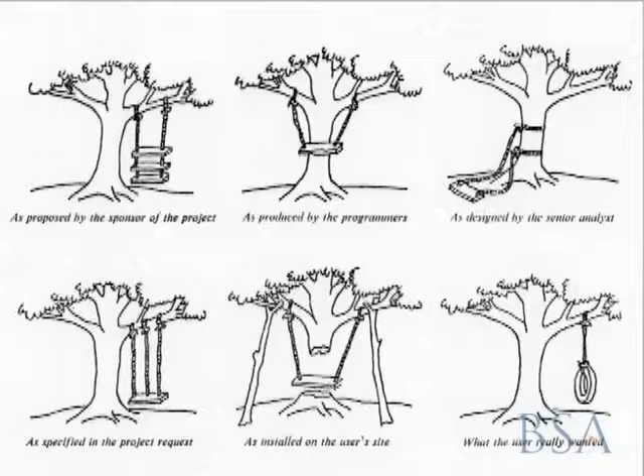Now, as we know, architects are quite a diverse group of individual practitioners. The client, equally diverse, needs to clearly describe a program for the architect to work on, which is not always very clear. The architect then needs to properly interpret that program and develop a scheme that fulfills the client's endeavors, and to some extent, at times large and small, to develop the architect's own aspirations.

The architect then works with a host of engineers and advisors to develop a set of construction documents, and then those documents are turned over to a contractor and subcontractor to interpret and execute. More often than not, a satisfactory piece of design is executed or realized.

What is often forgotten is the context in which a piece of architecture is built. Besides the physical and environmental context, there are often historical references, cultural background, social influences, visions and dreams to be realized, and special conditions that may challenge conventional approaches in terms of developing a solution.

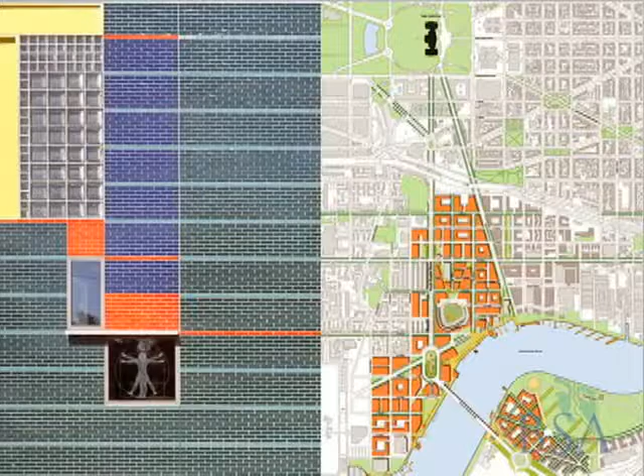Eventually, concepts and design translates program and context through a series of diagrams, drawings, and models that reflect certain patterns and relationships. The exercise of developing design solutions for architecture and urban design are very similar.

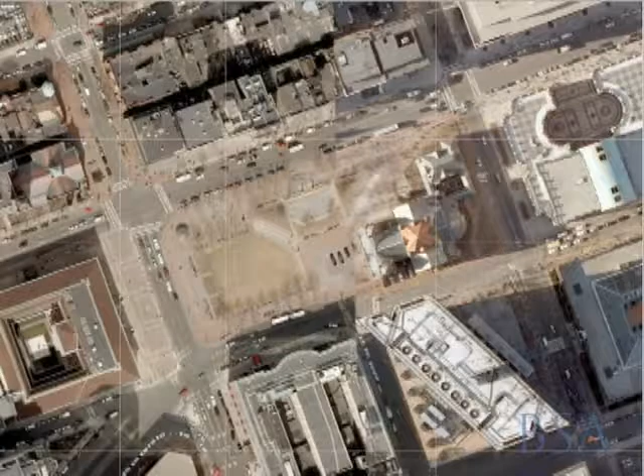I will demonstrate. For example, let's consider the planning and design of one of Boston's great public spaces, Copley Square. The space is framed by the Boston Public Library. Its formal facade is almost centered onto this plaza in front of it.

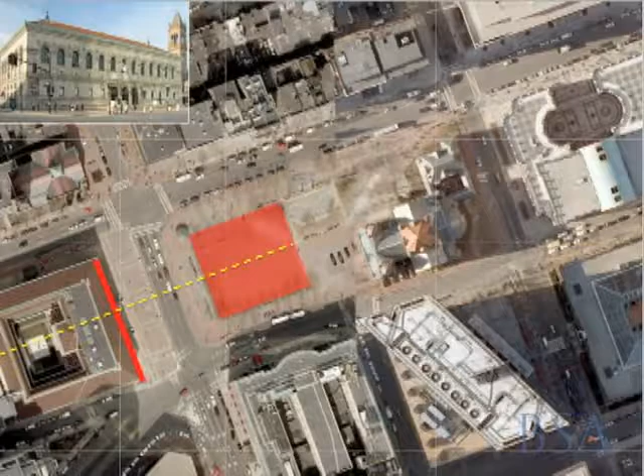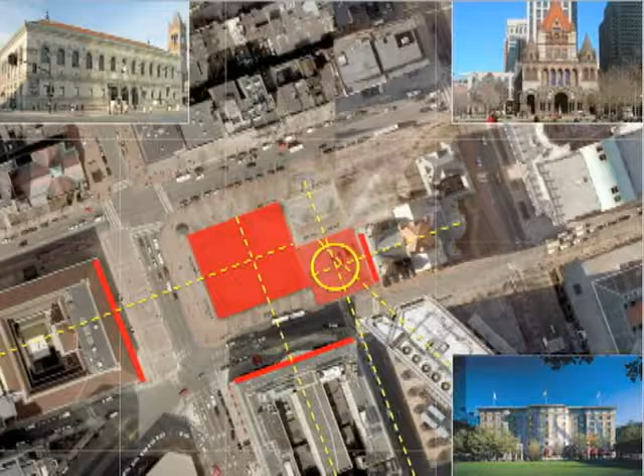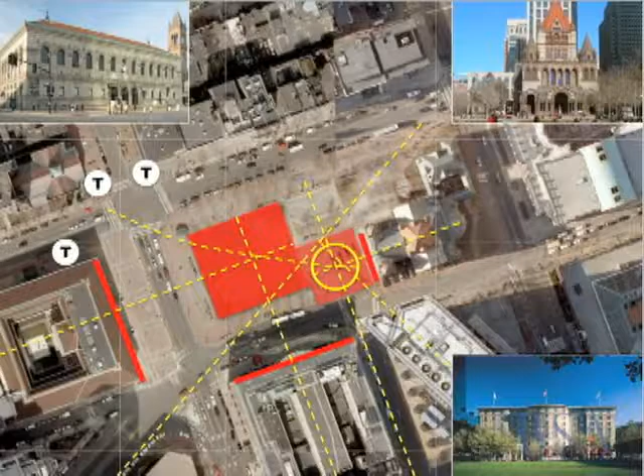The Copley Plaza Hotel similarly has a relationship to that same plaza. Trinity Church has a smaller little plaza in front of it, of which it's on axis, but Hancock Tower and Trinity Place is also aligned with that same space, and a vehicular drop-off, more formal arrival and departure point intersects all of that. There's a series of T stations that channel people from the intersection towards these two formal spaces and pass beyond.

Boylston Street is a relatively uniform retail street in which a series of landscape and trees help to reinforce that edge, as well as a smaller group of trees in front of the hotel.

The secondary facade of Trinity Church has a bosque of trees so that the front of the church is well set up, but it also adds to, along with another group of trees and a fountain, this landscape edge that buffers the formal spaces from the busyness of Boylston Street, but also brings the landscape edge into that plaza.

Now, such an exercise in thinking of, say, a typical apartment can be very similar. For example, if you want to think of where you might want to put a bed, and you like sunlight to come streaming through, but given the lack of walls, there's only one piece of furniture.

So you might say, well, that bed is also semi-private, but at the same time, your bed partner has to walk around that bed in order to get out of that room.

So you might think, oh, let's move that bed to the opposite wall. I get an extra piece of furniture. Sunlight still comes in, but it's over my head. The bed is still semi-private, and circulation is a little bit better.

Perhaps a third solution would be on the side — same amount of furniture, the bed is more prominent as one looks into the room, and circulation is equally divided.

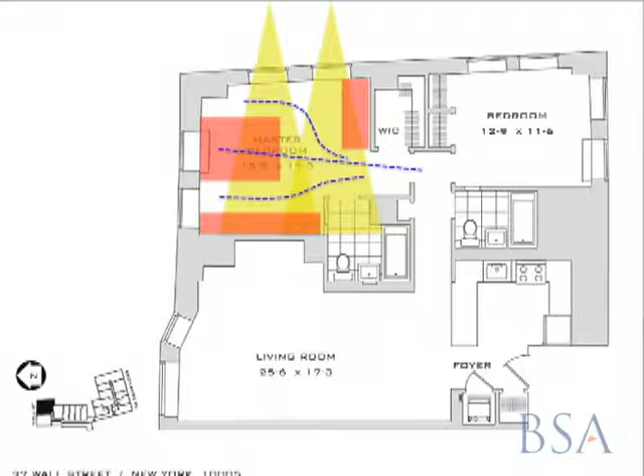You may feel, though, that this room is inadequate for your tastes or your needs, so you're going to convert and think of converting the other bedroom into a more elaborate suite, especially since it has both east and south light, and it's totally private from the doorway.

And you take it a step further, well, at that point, we wouldn't need the extra bedroom and the bathroom, and we'll create a much nicer living room, which can be featured as one walks in, and you have more flexibility in how you use that space.

Now, if we squint and imagine that windows and doorways are, say, street corridors or buildings, and the rooms are building facades, we may get some sort of diagram that looks like this.

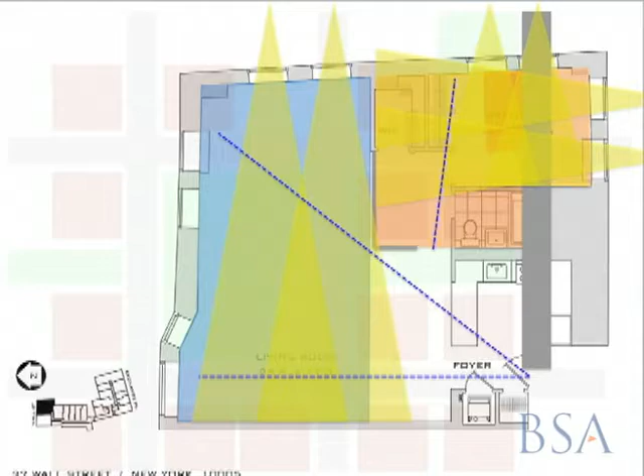Overlaid streets, blocks, parks, circulation patterns, deferring to sunlight coming in during the morning and afternoon. So the graphic exercise is quite similar if we think of both architecture and urban design as a designer's element.

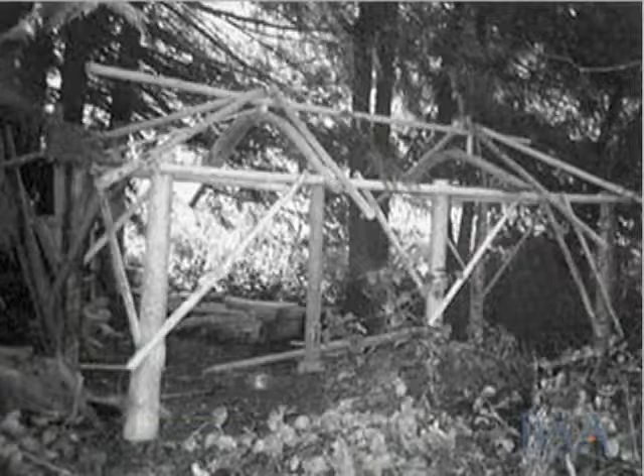Architecture doesn't always begin with context or environment. It begins with perhaps a fundamental structure of what it wants to be and needs to be. The simplest form of structure is the so-called primitive hut.

In the most natural setting, the primitive hut is a mere shelter, in this case, a tropical outhouse. But there can be regional interpretations of such a structure. There can be architectural mimicry, whether it's classical or brick. There can be influences set by site-specific conditions. There can be stylistic whims.

There can be advances through materials and manufacturing. There can be misguided attempts towards efficiency or hierarchy. There can be humor in being unabashed, yet private. That's a mirrored outhouse that you can see out, but you can't see in. Or there can be unabashed use that is entirely public.

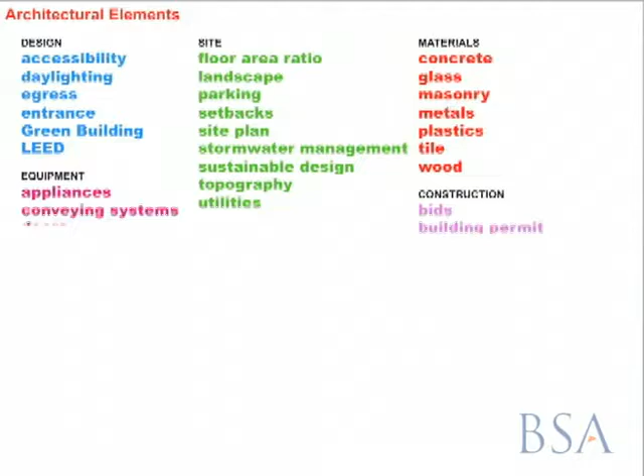There can be adaptive reuse. And there can be promotion and revenue production. Now, in all of those cases, in a nutshell, the product of architecture is largely centered on physical elements. Any connection to urban design is mostly through the design, the site, and regulatory elements. So you can see a lot of these things are related to equipment, wiring, etc.

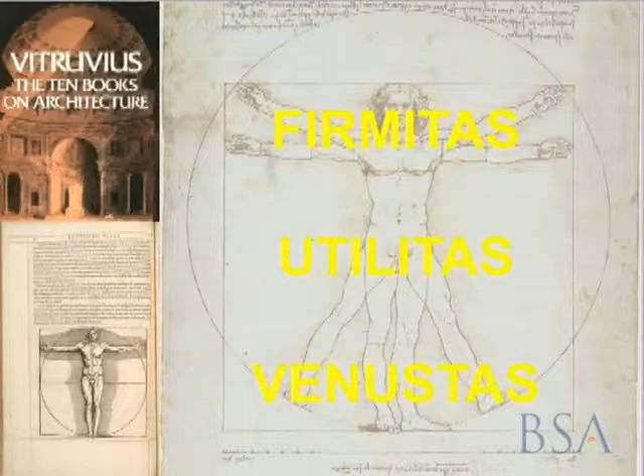The measure of success of architecture is often esoteric and subjective, although there are many attempts to codify that measure of success. Here, Vitruvius dictates that architecture should be beautiful, useful, and durable, or durable, useful, and beautiful. But given our diverse social and intellectual population, even formal measures can be interpreted, misinterpreted, and outright modified. As an infamous pirate of the Caribbean once said, codes are only guidelines.

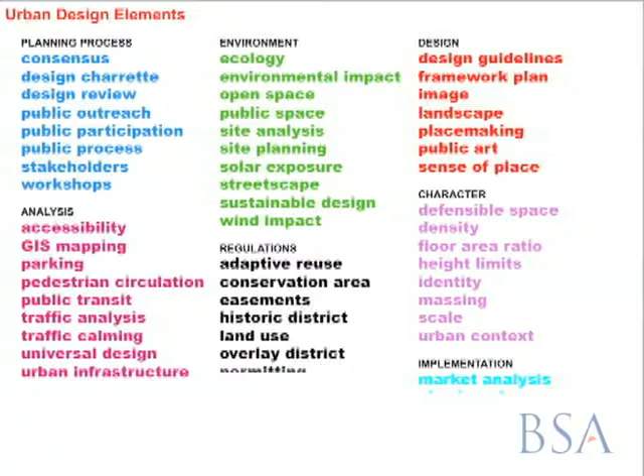Now, urban design, while architecture focuses primarily on the object, urban design primarily concentrates and considers the larger issues surrounding the object. Again, as you can see, the overlaps are in words like design, site, and scales of physical elements.

Urban design has come to be known as large plans, determining the direction, scale, and pattern of urban evolution. Urban design plans often work from a determination of what is good, what is desirable, or what is less desirable, how things fit together, and how things are linked in a cohesive manner.

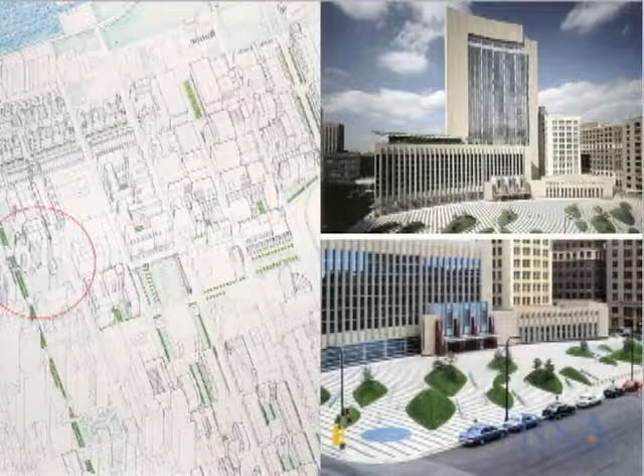The mitigating element is largely the public spaces that help unify and transition from one place to another. More often than not, urban design are just mere guidelines and take many years to realize, and it's interpreted by future designers. A measure of success would be the quality of materials, and in this case, a federal courthouse and a civic square, that the urban design plan was interpreted in a pleasing way.

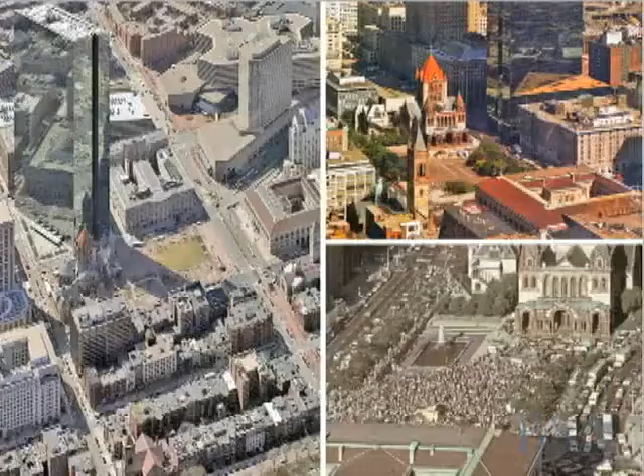Boston's Copley Square is one such place. However, it could have been very different if Huntington Avenue was allowed to remain as a through street passing by Trinity Church. And we could imagine commercial development could have happened there.

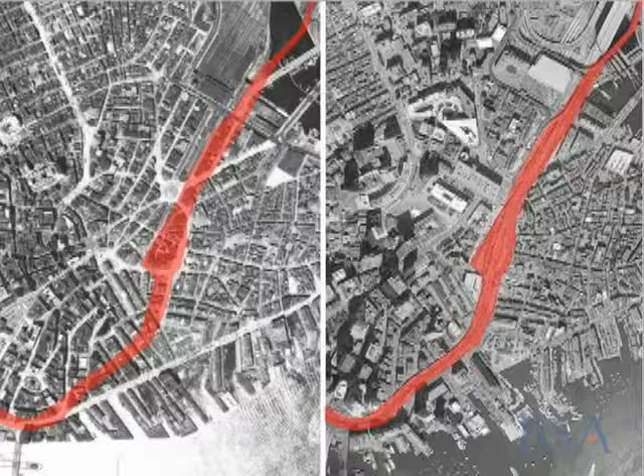Now, how urban design is used to respond to change is not entirely satisfactory. The replacement of the central artery, which cuts through a tight fabric of Boston, creating a corridor for the highway. What was once a dense urban fabric was replaced. The highway was replaced by a greenway.

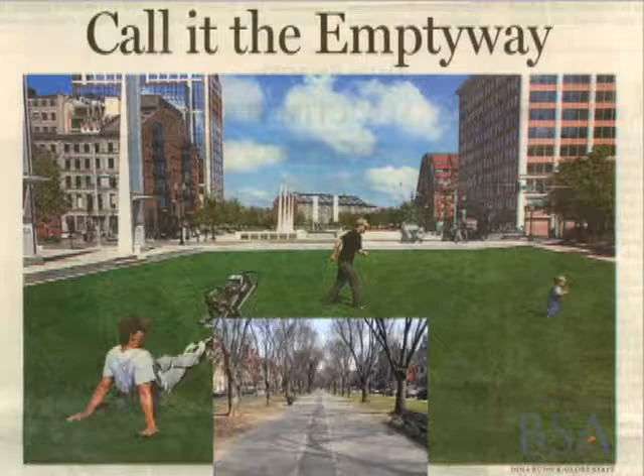That greenway, the recent reaction to it has not always been positive. It has been tepid. The 27 acres, while green and full of light, replaces a highway with a space corridor that is 50% wider than Commonwealth Avenue. The relative absence of trees, buildings, and activity exacerbates the scale of that open space.

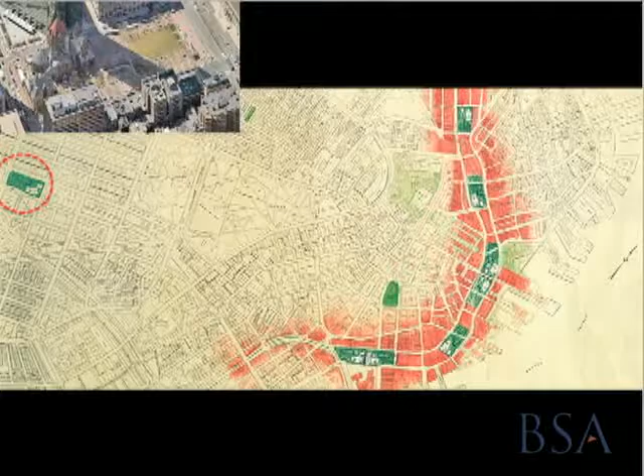Since Boston is known for its many squares, perhaps it's not too late in some distant future that the Greenway have an opportunity to evolve, and perhaps using the scale of Copley Square as a model, that 7 of such squares can be laid down along the Greenway, and the spaces between may allow the city to knit, reknit, and repair itself.

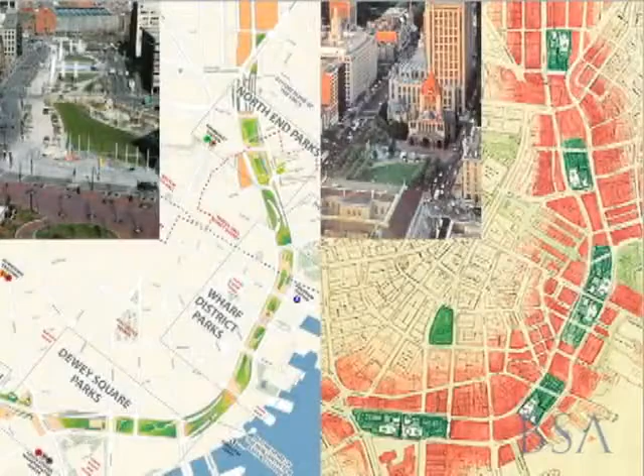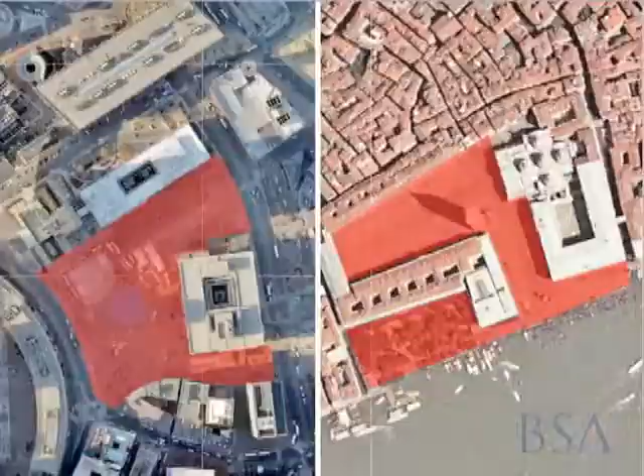Piazza San Marco, a known successful civic space, has a similar size and type of material in the plaza, and it's surrounded by buildings similarly, but a bit older and more uniform. Here you can see the comparison of the two in scale. What's most different are the activities along its edges.

San Marco is lined with commercial activity all along its perimeter. There's plentiful seating. Nightlife, art displays, and carnivals are a recurring feature, particularly lighting, inviting participation in activity. City Hall Plaza can have the same.

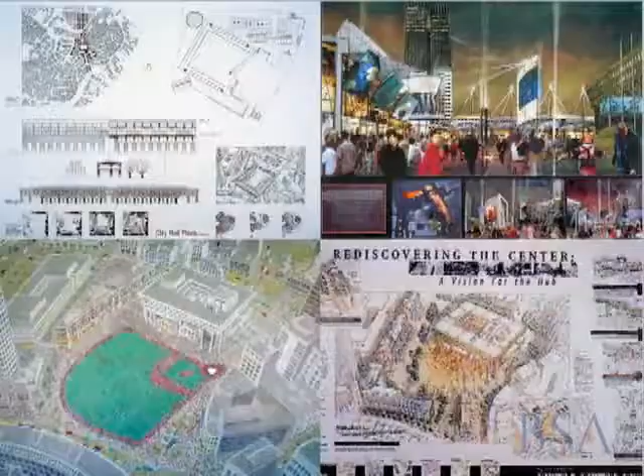These are some ideas generated over the years that people have sent in of how we can rejuvenate that space. And we could even be playful and have selective programming events that are carnival in effect. So what possible elements might there be?

Right now, government buildings with live activity, perhaps some commercial activity along the edges to provide 24/7 activity, some landscape, some improved paths, especially extending Hanover Street back towards North End, improving the connection to the harbor.

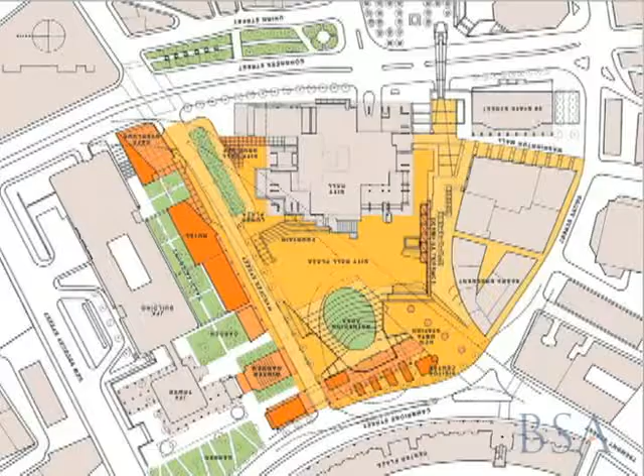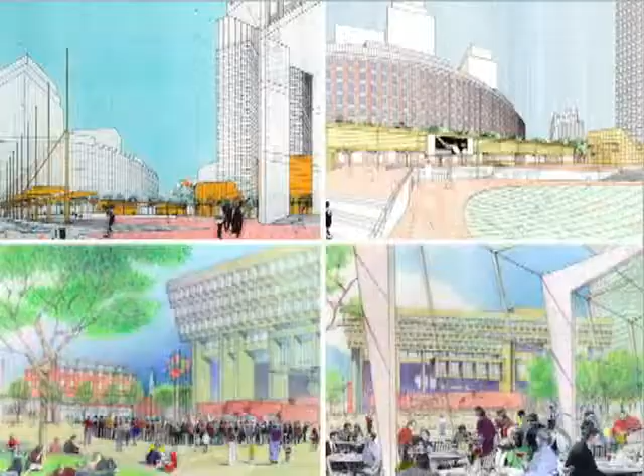Some water feature, perhaps on the surface, that can be turned off when you need room for large crowds. Improving access to the subway, even modifying the edges of City Hall itself.

So far, one edge of City Hall Plaza is improved by a pergola that provides some lighting, some seating, some shade. What hasn't been done is utilizing the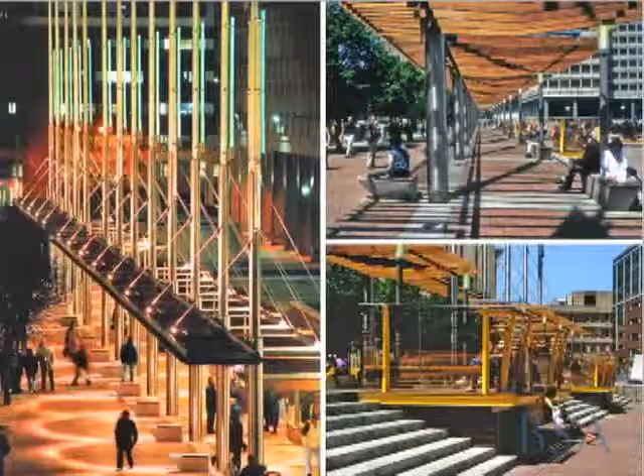structural columns to string screens for evening shows. That's never been done, but they are capable of implementing it.

Just improving the lighting of City Hall itself can transform the character of the place, just as it was when it was initially built. It's the underfunded maintenance that makes the plaza and the building look less desirable.

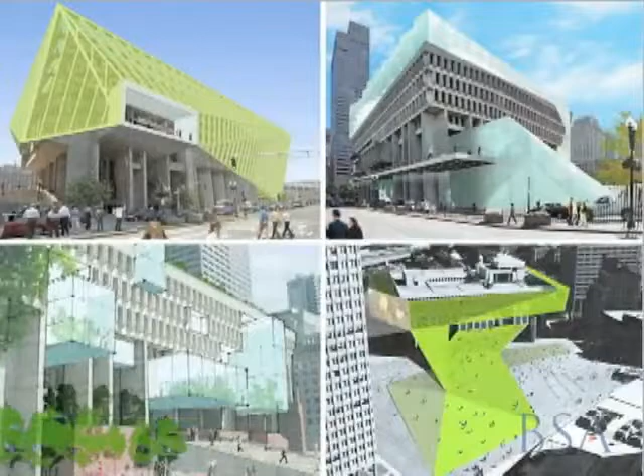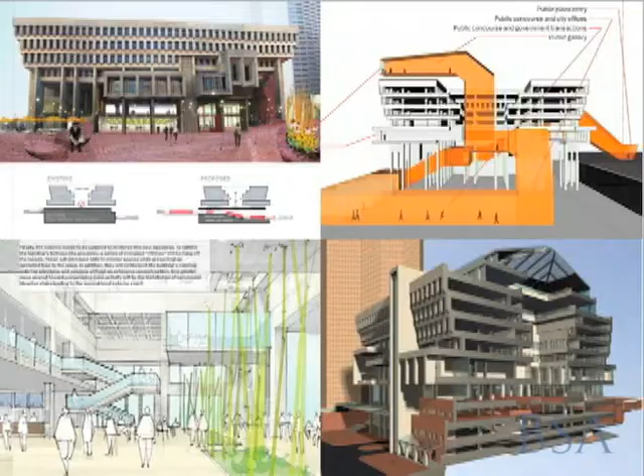The building itself has been subject of ideas and competitions. Just some recent concepts by some creative young architects here in Boston of transforming the building, making it more engaging, more connected to its exterior, allowing more penetration into the building and pedestrian circulation through it, activating the building with uses that invite people in.

Outside of Boston City Hall, it's always been envisioned that it plays a part in this sort of walk to the sea, this connection from Beacon Hill all the way to Long Wharf.

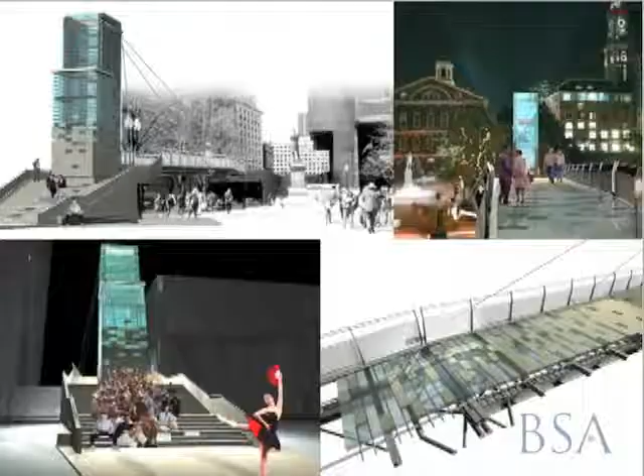But it's always had some trouble in terms of the pedestrian crossing at this busy middle intersection, or rather a mid-block crossing. One solution might be to continue that deck of City Hall as a bridge, terminating at a grand stair and an elevator that would finally make City Hall Plaza pedestrian accessible, or handicap accessible.

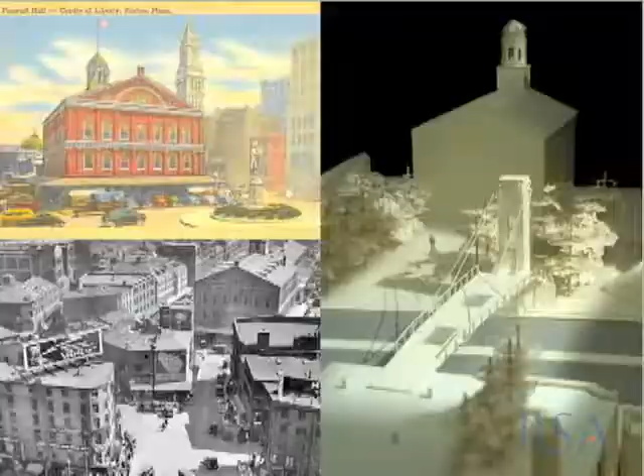Now, this is the back of Faneuil Hall. It's always been a very congested and busy place, and now it's Dock Square that accommodates quite a lot of activity. A connection that safely brings people across to participate in the activity is one thing that will help reinforce that square.

So all the above musings have looked at integrating physical intervention between architecture and urban design. Not discussed, as you can imagine in Boston, are the many political, economic, regulatory, and other obstacles that make such musings impossible. However, if we do not use our imagination and dreams of visions, then surely things will not change.

So the next time you sit on a swing, think of your environment and wonder how it can be made better, and engage yourself into realizing it. Thank you.

Does anyone have any questions?

Sir, do you think public policy can have a vision, or is a vision by committee? Of course, it's always possible.